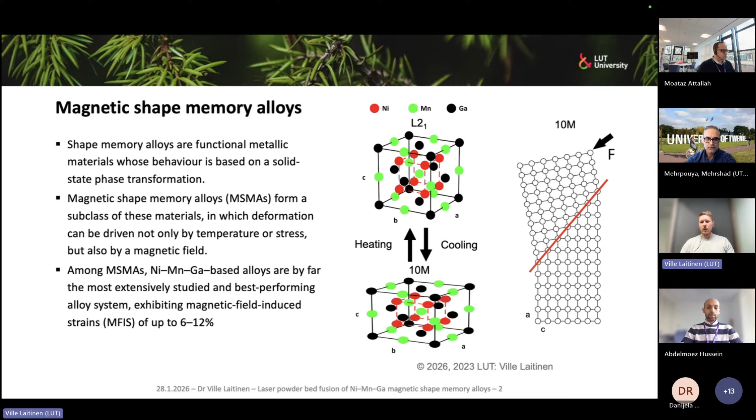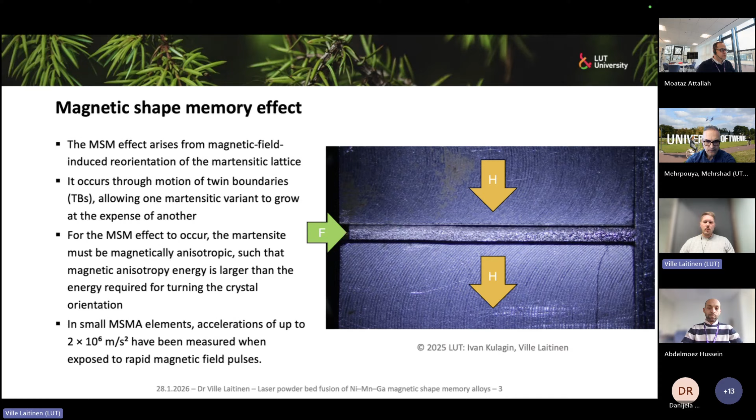Okay, here. So magnetic shape memory effect: you can see on this right side video, that's actually a nickel manganese gallium single crystal in an electromagnet. And where you have this marking F with the arrow, that's spring-loaded pressure. So by external magnetic field, we effectively elongate this element. And then once the field is removed, by the spring force we are bringing the element back to its original configuration.

And how this effect actually happens is that we have nickel manganese gallium martensite. In this figure, we have a 10-layered modulated martensite, which, if you consider the original cell of this L21 austenite, is actually a tetragonal cell. And this tetragonal cell has axes A, B, and C, where A and B are approximately equal to each other, and the C axis is shorter.

But what is nice with this material is that we have these manganese atoms placed by nickel and gallium at just the right distances from each other that we actually have a magnetic moment on those manganese atoms. And this material effectively becomes ferromagnetic, and this C-axis, the shortest crystallographic axis, is also the easy magnetization axis. And it's characteristic to this material that the magnetic anisotropy energy is significantly larger than the energy required for moving crystal boundaries, these twin boundaries between different martensite variants.

So what happens when we bring this external magnetic field is that this C-axis starts to exhibit magnetic field induced stress, which tries to pivot the C-axis direction in the direction of the external field. And this provides a pressure on these twin boundaries to be moved around. And since the variant which is in a preferred orientation grows at the cost of the variant which is not in preferred orientation, we will actually have a physical change in the material because of this flip of crystal orientation.

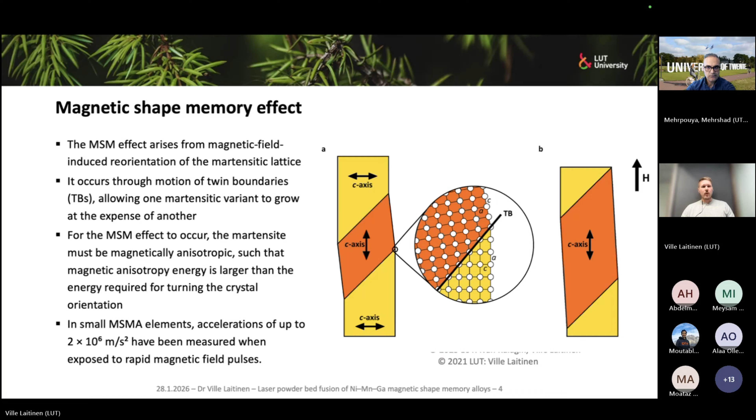I will cover a little bit of applications also. So one of the best applications we have developed so far is the magnetic shape memory micropump. How this works is that we have a nickel manganese gallium single crystal, and we bring under this crystal a diametrically magnetized cylindrical magnet. And by rotation of this magnet, we generate on this single crystal a tiny undulation. And by rotating the magnet, we can move that undulation across the single crystal surface, and in effect, we can use it to carry liquid. So it works in a very similar way as human swallowing works in a throat.

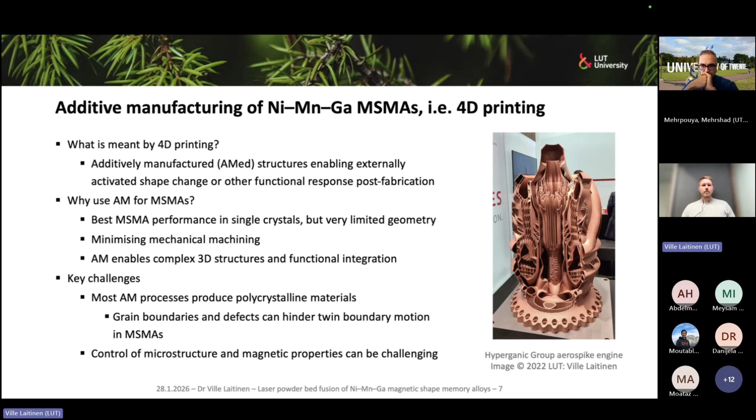So the process, laser powder bed fusion, you are probably very familiar with, so I won't go into much detail. The essence is that we have this powder bed in a sequential way. We spread powder and selectively melt it from above with the high power laser and repeat the process until we get the full 3D geometry manufactured.

Why we chose laser powder bed fusion in particular for this material is twofold. First, conventionally they have been using a lot of binder-based processes to make nickel, manganese, gallium. The problem with binders is that this binding agent, this chemical you bring into the process, is very easily transmitted into the metallic lattice of nickel, manganese, gallium during post-processing heat treatments. And if you alloy, for example, your nickel, manganese, gallium with carbon or even oxygen, you effectively ruin first the magnetic properties, and secondly, your twinning stress starts to increase so drastically that you won't be able to move those boundaries around with an external magnetic field.

And the second reason we use laser powder bed fusion is the feature resolution. With laser powder bed fusion, we can actually make very, very small actuators. And this type of metallic smart material performs exceptionally well when made into very small devices. In very small devices, conventional mechanisms like electric motors, for example, are very difficult to manufacture. So smart materials have a big competitive advantage there.

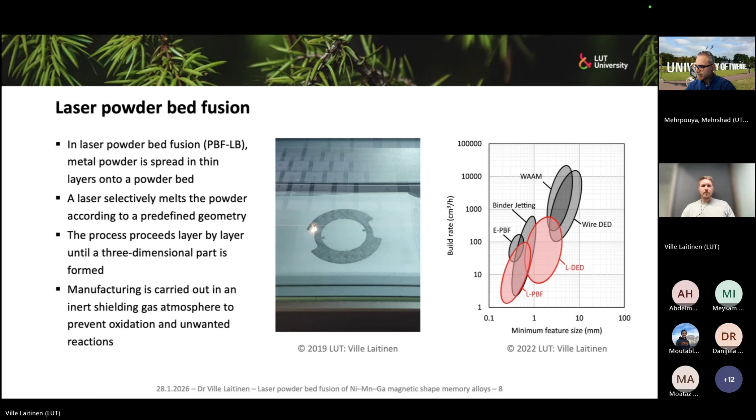The feedstock we typically use for laser powder bed fusion is argon gas atomized spherical nickel, manganese, gallium powders. The advantage of this gas atomization process is that we get very dense, spherical particles. So these are very good for the laser powder bed fusion process itself from the spreadability point of view. And also we are not bringing any inherited porosity with the particles themselves.

Then also an advantage, because it happens in an inert atmosphere, is that we have typically a very low oxygen amount in the powder itself. What we have been measuring from our powders is typically in the range of 200 ppm. Of course, this can significantly degrade if you are recycling your powder, so you can actually start accumulating quite substantial amounts of oxygen, and that's a critical point from the making of functional material, that you might need to actually keep track of how much oxygen you are putting into your powder.

But then the key result is that during this development, we have actually made quite a few batches of this, and it's clear that we need to overdose these powders with manganese because of some selective elemental losses that happen in the laser powder bed fusion. And this is something I will discuss in a couple of slides.

How the process itself, when we develop, how do we work? The basic track usually, if we start with new materials, is that we do single track, single layer kind of experiments just to see where we have a zone of weldability for the material, where we can achieve, for example, crack-free melting of the material with good wettability of our substrate material, so that we get a really good weld bead without substantial defects at that stage already. And if we manage to make a process which works in that stage, then we can move to 3D geometry.

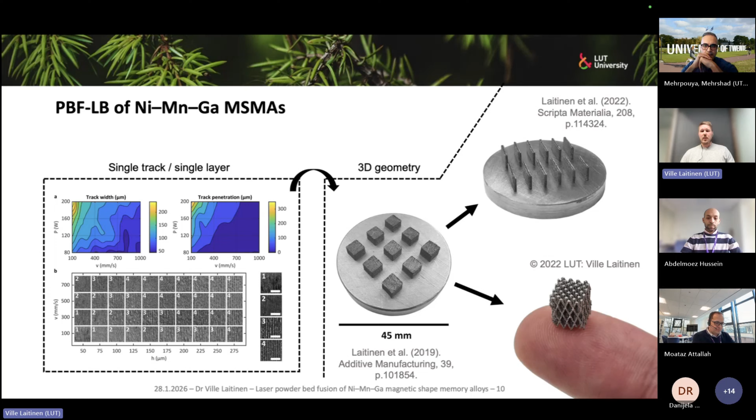Now, from a nickel-manganese-gallium material point of view, we need some necessary post-processing steps, the first being the heat treatment. After the laser powder bed fusion itself, we have a huge amount of atomic disorder inside the material, and in order to recover magnetic properties especially, we need to do a high-temperature heat treatment where we get these atoms in the right places so that we have long-range order in our atomic lattice.

We usually use a two-stage heat treatment. We have this homogenization treatment, which is quite close to the solidus temperature of the material. The point of this treatment is just to distribute those atoms equally within the geometry we have made, so basically it's just diffusion. Depending on the times, it can be something in the range of a couple of hours, or in the case of bigger parts, up to a 12 to 24-hour treatment. We can also induce quite substantial grain growth in this treatment at that temperature range.

And then we have the secondary treatment, which is the ordering temperature. This is just above the transition temperature from the B2 unordered cubic phase to the ordered L21 austenite. The point of this treatment is that we are setting our atoms in exactly the right positions just before we cool over this transition. Out of these two treatments, this is the more important one for the magnetic properties. If we go over this transition too fast, we lose some of our long-range order, and then we will have inferior magnetic performance.

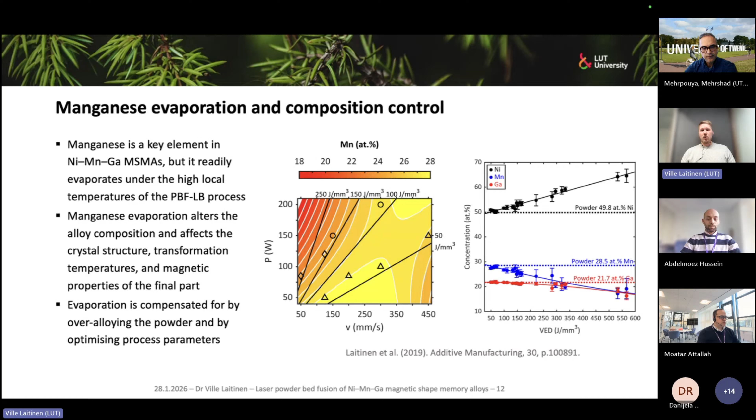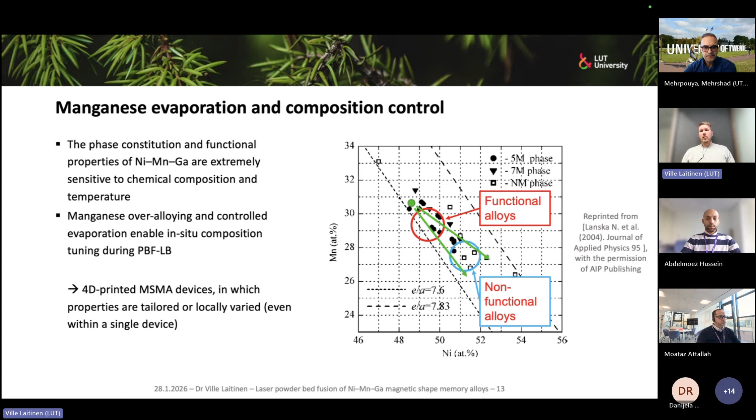And we have shown that we can actually use this for tailoring our material. We can do some fine tailoring of the martensite transformation temperature, or we can render some zones in the material or final component completely inactive. For example, in one of my studies we have this initial powder, and then this S1 sample, which is 10M martensite, the preferred martensite variant if you want a functional nickel-manganese-gallium actuator.

And then we have this S6, which is a material with non-modulated martensite. In undoped nickel-manganese-gallium non-modulated martensite, the twinning stress is way too high. You won't be able to actuate it magnetically. So it is actually a passive material, but we can still use it as magnetic shielding, for example, in a real actuator.

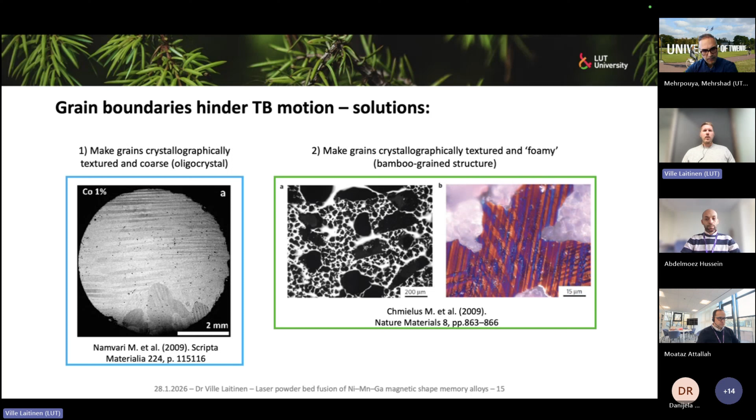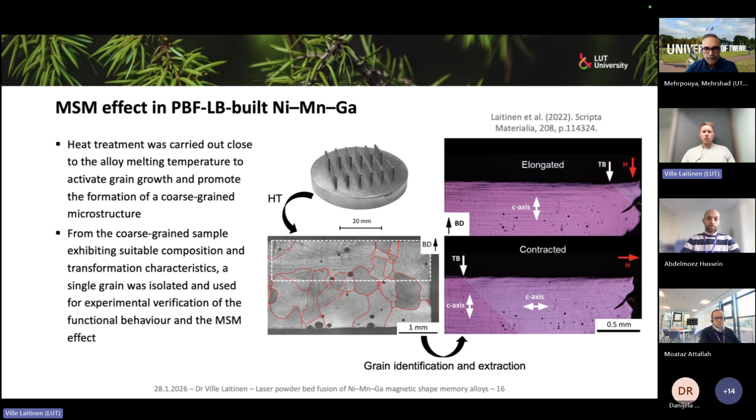And when we have this grain coarsening, then we could select an area where we could extract the grain for actual testing. So we can actually know, does this material itself have such a defect structure that it would actuate, or would it not actuate? And in this material, we could actually make almost full strain. So we can get this 5.8% magnetic field induced strain, and with this particular alloy, the theoretical maximum strain is around 6%. So it's nearly maximum theoretical strain.

And on the right side, you can see these video clips. The top clip shows different twin boundary types we could observe in this particular sample. So we have two different twin configurations. One is the normal style twin, type 1 twin, which is a very rational plane of twinning. It has a high mobility, but then we also have a type 2 twin, which is actually ultra mobile. The twinning stresses in a high quality single crystal for type 2 are in the range of 0.1 megapascal.

So the twin type 2 mobility is so high that it's almost impossible to take a good electron microscope image of it, because in the electron microscope we have an electron gun, and the electron gun generates a magnetic field. The magnetic field generated by this gun is so high that it can actually move this type 2 boundary out of the sample. So a very highly mobile boundary.

But then we also have this bottom case. This is what we would like for an actual actuator: multiple boundaries, ideally hundreds of them. So we have a finer twin structure, and this is more stable. The strain becomes very stable, and we also avoid some critical malfunctions, for example, crossing twin structure, where we have two twins that are tilted in the wrong direction, and they lock themselves into place, and it can actually shatter the sample. So that's something we might do in a post-processing step.

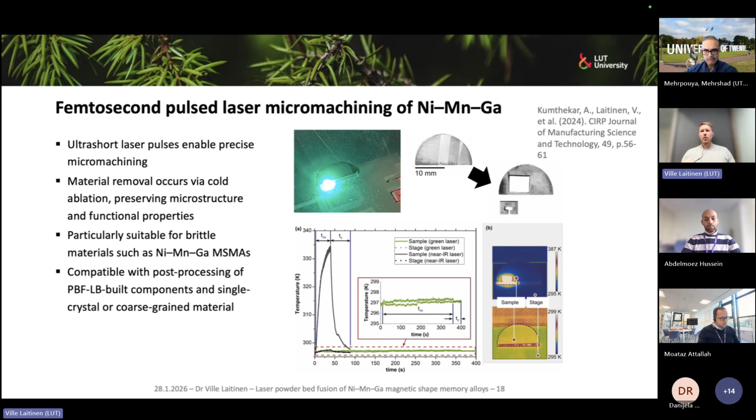So we have an example here we made from single crystal, this kind of micro gripper actuator, and it works fantastically. And we also showed that if we use green light for the machining itself, we have slightly better machining performance, and through this process we can actually machine it in martensite, so we don't need to heat it to austenite for the machining process itself.

The other approach we can take is to try to get more of this coarse grain structure. We could use epitaxial growth. This of course limits the geometry you can make, because epitaxial growth cannot be achieved in any possible geometry. We have some limitations related to it.

In this case, we made something that is more of a thin wall structure, but we tailored the processing parameters so that the single track melt pool we generate has a very shallow behavior, meaning that it's not very deep, but it's very wide. This forces the single crystal, or crystallite, to grow in a very defined direction of the thermal gradient.

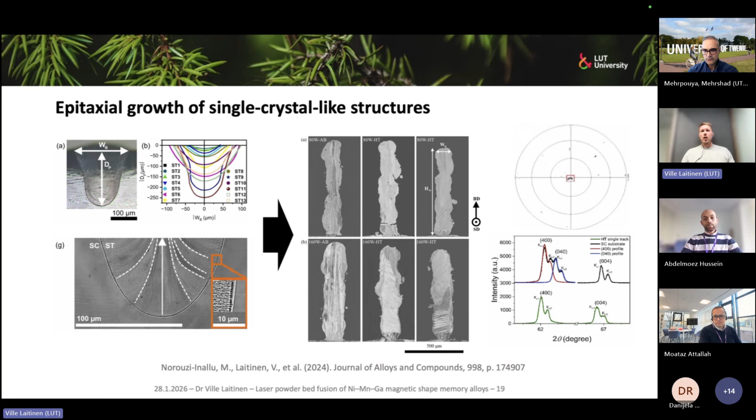This way we can make wall structures where the crystal Z-axis points up during the process. Then in a post-processing heat treatment, those very similarly oriented grains can fuse together, and we can have something very close to a single crystal. The disadvantage is that those samples tend to be very small. So we are trying to find ways to sustain similar growth behavior in a much larger sample, so we could have a larger single crystal by additive manufacturing.

Another way, which we have worked on quite extensively with Moataz's team, is what we call the bamboo grain geometry. We don't go directly into foam making, because the foam has a huge fraction of porosity inside, and the full force output of the material will significantly reduce because of this. But in additive manufacturing, we can tailor the porosity very precisely.

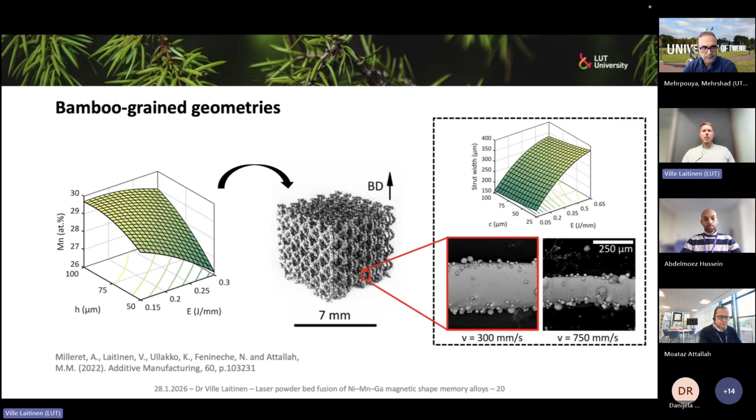In this case, we make lattice structures and tailor the parameters to achieve a very specific strut width. Then in the post-processing treatment, we can do some tricks to make this structure locally bamboo grained. We first show how we do the measurement itself.

We use high temperature EBSD, because we want to do these measurements in the austenitic phase. Martensite makes a very complex diffraction pattern, which is first very difficult to index, and second, it's very difficult to determine what is a martensite colony versus an actual grain boundary. So by heating, we can reveal the real grain structure.

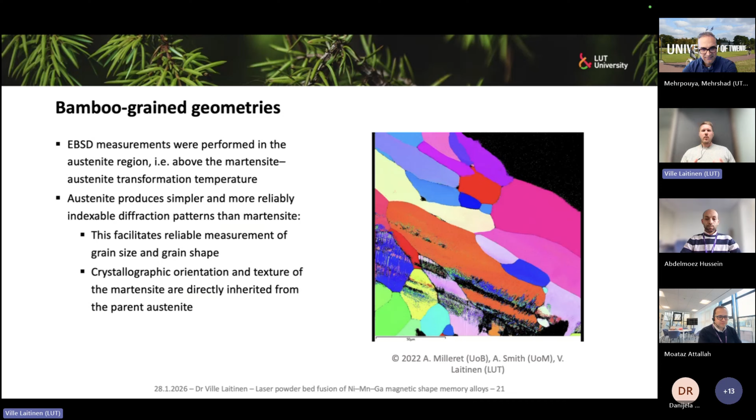The advantage is that the crystallographic orientation and texture of the austenite are perfectly correlated to the martensite. There's only a 0.3 degree deviation in the axis direction, so it's nearly the same from the actuator point of view.

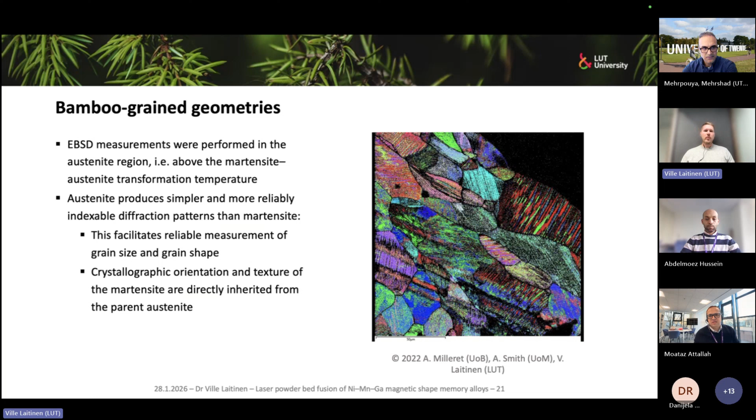Ville, try to wrap up if you can, okay? Yeah, I have two slides.

It's okay. As built, we can see very tiny grains, but in the post-processing heat treatment we expand those grains and they fill these narrow struts, so we get a structure of interconnected single crystal struts, and node areas with several grains. In an external magnetic field, this type of structure can strain 6%.

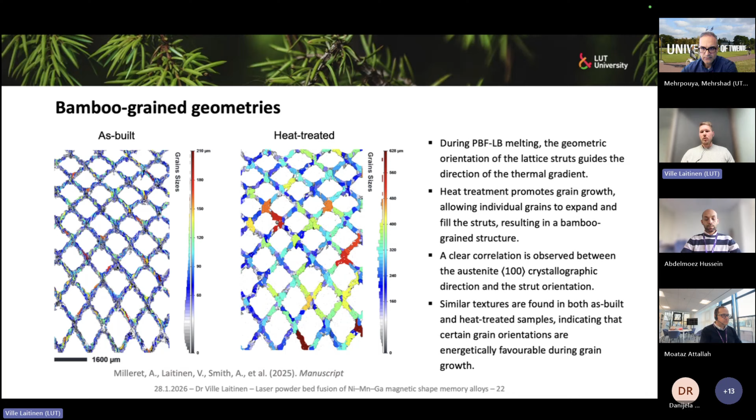In the martensite. So it is effectively a good actuator approach, but it takes a lot of tailoring of the ideal strut angle and the ideal way to implement the actuator based on this structure. The nice part is that the crystal orientation tends to follow the strut direction because of the thermal gradient, so we have crystallographic texture of austenite, translated to martensite, and after heat treatment we don't lose this texture significantly, so we maintain some primary directions, which still should be modeled a little better.

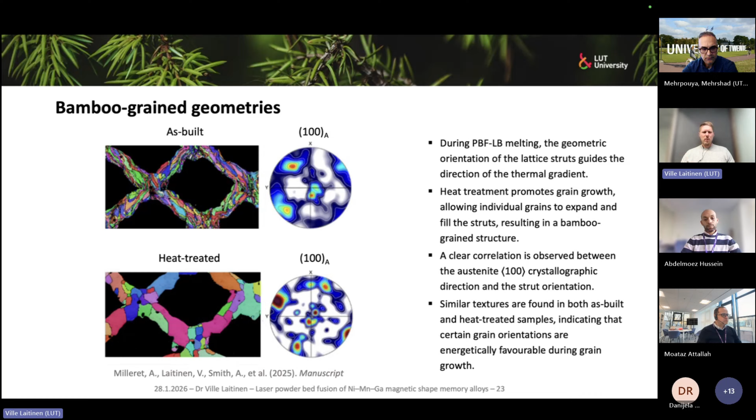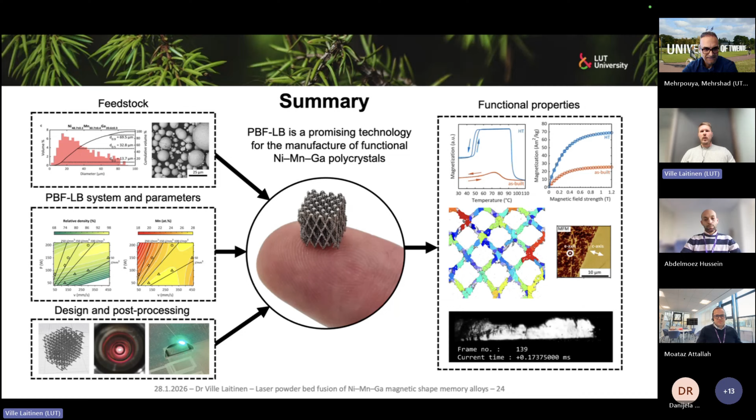So can we manipulate this behavior a little bit more? And this is a short summary. We have lots of different considerations from the feedstock and processing point of view, and then what we can actually do with the functional material.

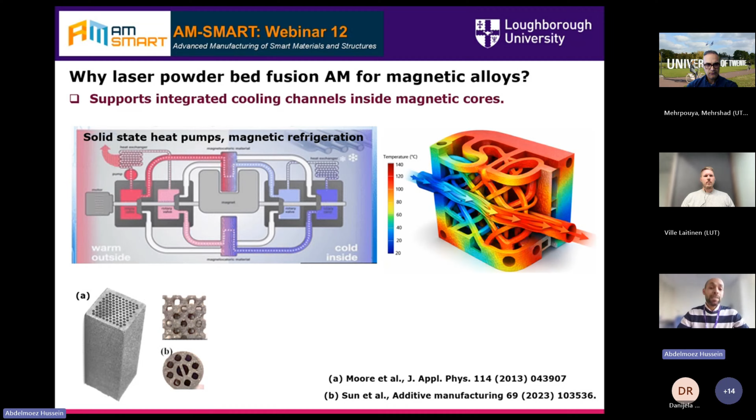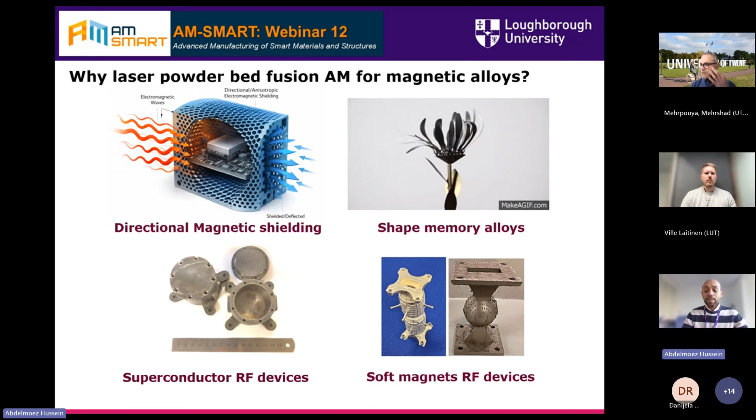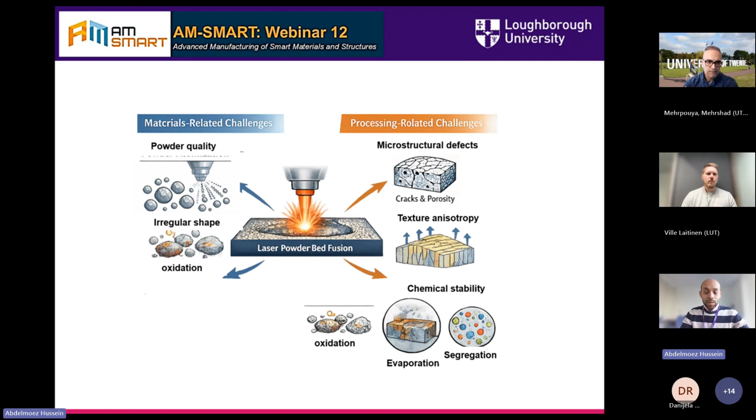So now we know why we can use laser powder bed fusion in some magnetic applications and why they need it. Now I'll go directly to the challenges that we may have when we process a magnetic material in general. There are two kinds of challenges. The first one is related to the powder itself once we start to produce the material, and the other challenges come when we start to process the material. I'll talk about every item specifically. Let's start with the material-related one.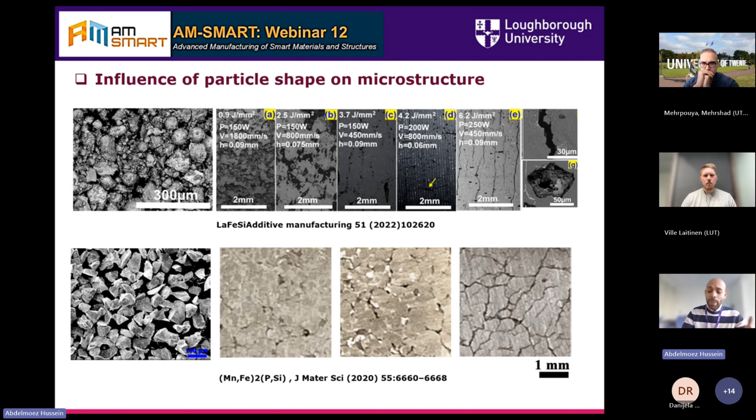Probably the crack width is almost 10 microns, or probably 15. The lower one as well, there are a lot of cracks. And unfortunately here, these microstructural defects are not related to the laser processing parameters. Of course they are related to the processing parameters, but more likely to the flowability of the powder. They don't flow nicely due to the rocky shape, or the many satellites they have. So they have another defect added to the process, and you can't get rid of it, even by changing processing parameters.

The second one is oxidation. For this powder, what's the amount of oxides in the material? This can be determined during the atomization process. A lot of powders you can just start atomizing without gas to protect from oxygen. However, magnetic materials are very, very sensitive to oxidation. Even a very small amount can change the material properties.

The second thing that I have found is how many times you are going to use your material. If you use your material for the first time, you can probably get good magnetic properties from the resulting additive manufactured part. However, I was very keen on every build to keep the material isolated from the atmosphere in powder storage, and to keep it away from oxides.

However, what I found is that every time I start the second build, third build, fourth build, the material properties start to be different, even slightly, which results in poor magnetic properties with recycling. So powder recyclability is another issue.

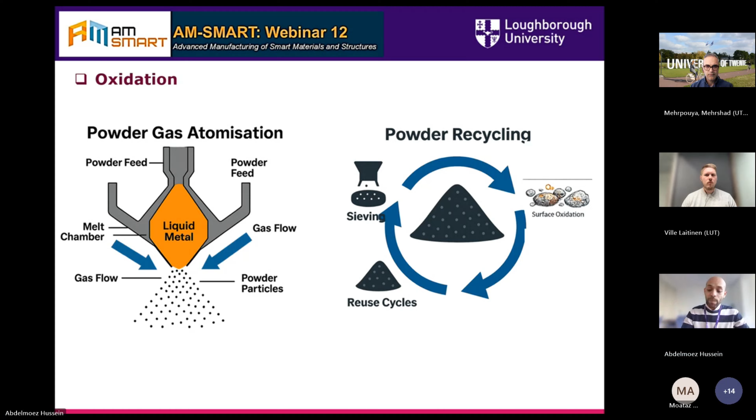So now we will move to the process-related challenges, and the first one is magnetic anisotropy. To understand how laser powder bed fusion affects magnetic anisotropy, let's first know what magnetic anisotropy is. If we have a magnetic material and you apply a magnetic field in one direction or another, the material responds in a different way. So let's summarize it as a different response of the internal magnetic properties of the material according to the applied magnetic field direction. And this is a hysteresis loop.

This is what we need from soft magnets, for example. And this is a good example of magnetic anisotropy. For the black one, the material starts to saturate when I apply a small magnetic field, probably at this point, 100, and the coercivity is low. So this is good for a soft magnet. However, for the same material, when we change the direction of the applied magnetic field, it's almost not saturated, and the coercivity is a little bit high.

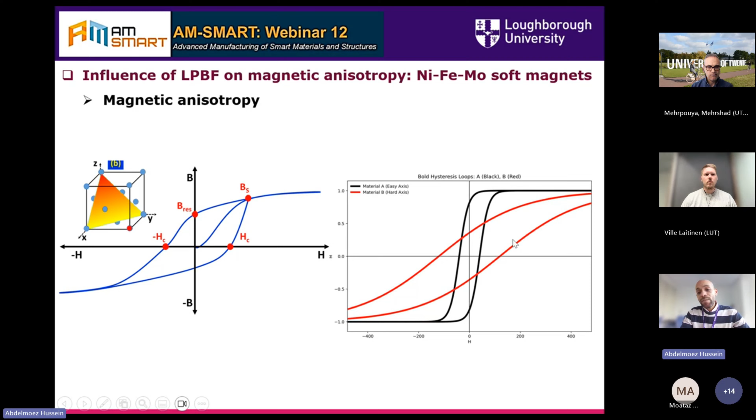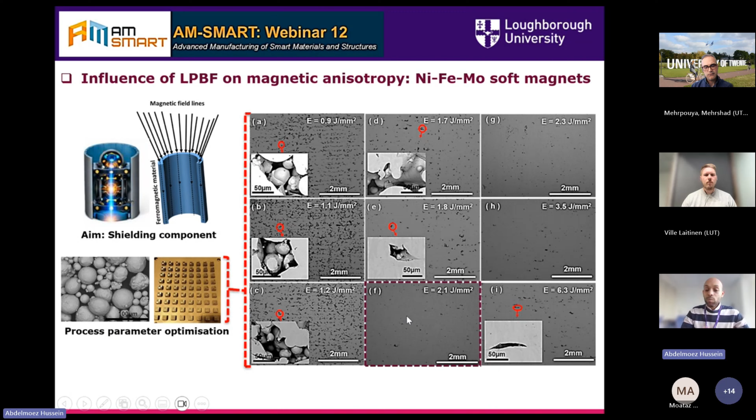So how can laser powder bed fusion affect magnetic anisotropy? One of the examples we faced for magnetic shielding was permalloy, nickel-iron-molybdenum, to make a component for magnetic shielding. So we normally start from powder, go through the design of experiments to optimize the laser parameters, and we found a good condition, which is letter F. Now we achieved minimum porosity. So let's discover the magnetic properties, which is the logical step.

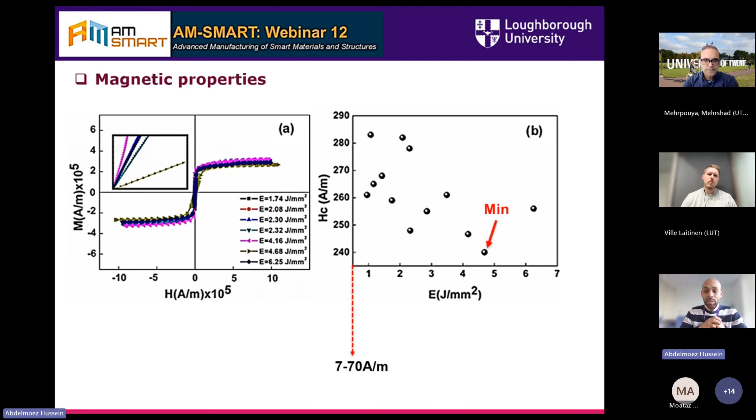We found that even this condition with the lowest porosity has a coercivity of almost 240 ampere per meter, which is way higher than the commercial one, which should be between 7 and 70 ampere per meter. This big difference between the commercial one and the additive manufactured one must have a reason. To know what we have, we went for the internal investigation, and we got something interesting from the XRD.

From the XRD, we found that all samples with all the different laser powder bed fusion parameters have a rich texture in the 100, and the 111 is weak or a little bit low, and this has also been confirmed by EBSD. This is important information because, from the magnetic properties of this alloy, the high 100 texture corresponds to the hard axis of magnetization.

So this is a magnetic anisotropy that we have. So that's why the material gives us a very high coercivity and the poor magnetic properties, because in all our samples the texture has been arranged on, let's say, the bad axis. So that's why it resulted in the poor magnetic properties.

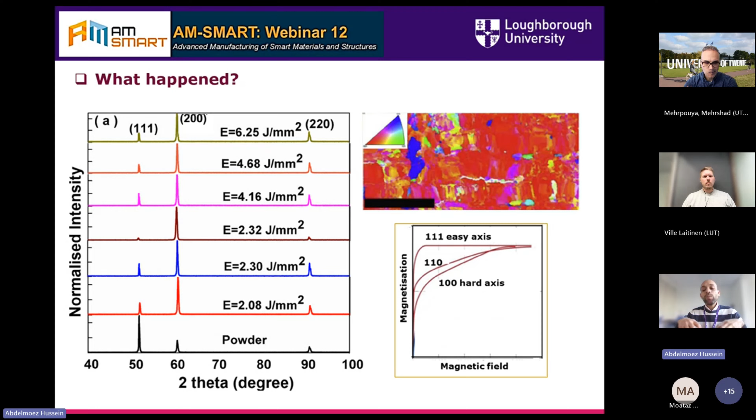So the solution for this one, we try to control the texture. We try to get the texture back to the easy axis of magnetization, and to see, can we manage to do this? So we try to tilt the texture by tilting the cube by 35 and 45 degrees, as we can see here, with respect to the build direction. And when we have done XRD, we find that the 111 direction starts to grow again, and that has also been confirmed by the EBSD.

And when we measure the magnetic properties again, we find that there is an improvement on the coercivity from 244, it even decreases to 76, which is very close to the commercial one. So at least we managed, by controlling the microstructure, to get very close to the commercial ones. And that was one challenge.

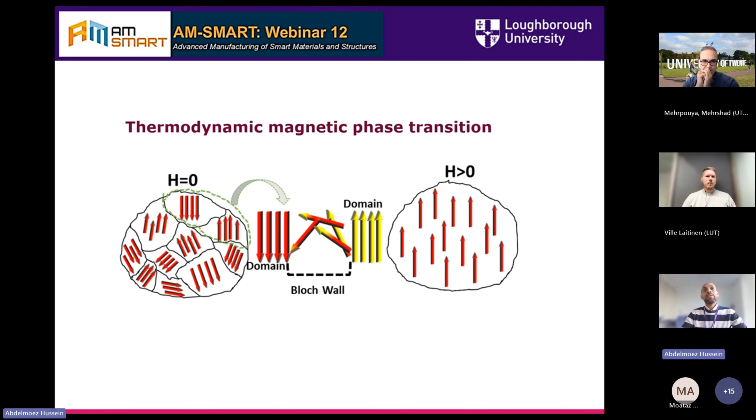The second challenge from the processing viewpoint is the thermodynamic magnetic phase transition. To understand what this is, we will have a look at a case study, which is magnetocalorics. Magnetocalorics are materials that can heat up or cool down once we apply a magnetic field, which is used in the solid state heat pump example that we have seen on the first slide.

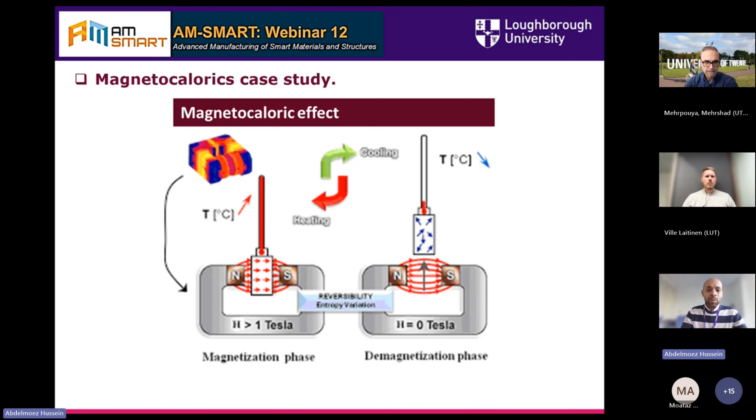So we were doing some work on these magnetocalorics, and there is a ferromagnetic-paramagnetic thermodynamic phase transition. There are a lot of phase transitions, but we will take the ferromagnetic-paramagnetic as an example, and I think it's going to be almost applicable to other thermodynamic transitions. Here we can see the spins of the magnetic domains are at low temperature in the ferromagnetic state, and with increasing temperature they start to get randomized to the paramagnetic state.

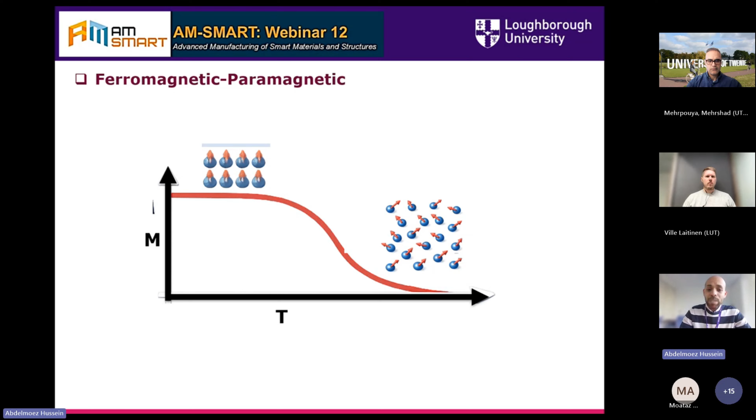How can this process be affected? This transition is a very critical transition for the applications that we are looking for. So there are two kinds associated with this transition. It could be a first order or second order transition. In the first order transition, this drop in the magnetization should be sharp and discontinuous, and it's associated with a heat exposure, which gives us the applications that we need.

However, in contrast, the second order has a very gradual transition and no hysteresis, which is associated with probably very low temperature change, which is not required for our application. We need a material that, when we apply a magnetic field, has a first order transition, so we can have a high temperature response. So we start as normal from powder.

The powder was good. It shows almost a first order, as we can see, like a sharp drop. This is the magnetization at room temperature, of course. However, when we process using some parameters, we can find there is a gradual transition, which is an indication of a change in the transition. Some of them give a sudden one, but we will see why they give this one later.

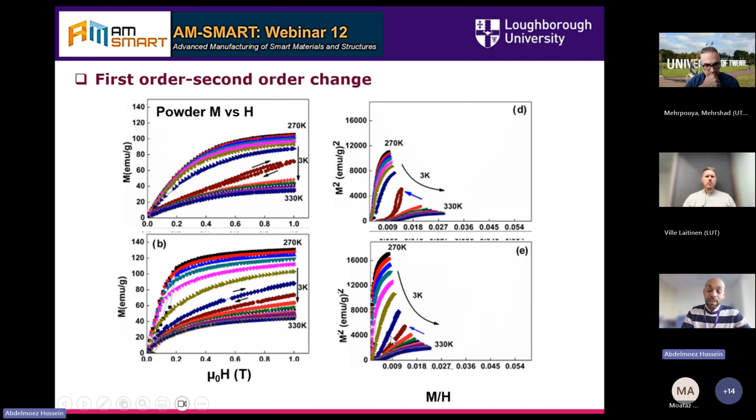So the reasons why we lost the first order, sorry. This is because there is a segregation happening in the material. This segregation affects the chemical composition of the material. So the starting nominal compositions that we started with have been lost in segregation to secondary phases, probably oxides, probably iron, probably lanthanum. So secondary phases are affecting the phase transition itself.

The second one is the evaporation. As my colleague Ville has just said, it's very sensitive, specifically for manganese. And for manganese here we have it. We find that the manganese starts to decrease a little bit, and even silicon and even lanthanum. So this is affecting as well the first order transition to the second order.

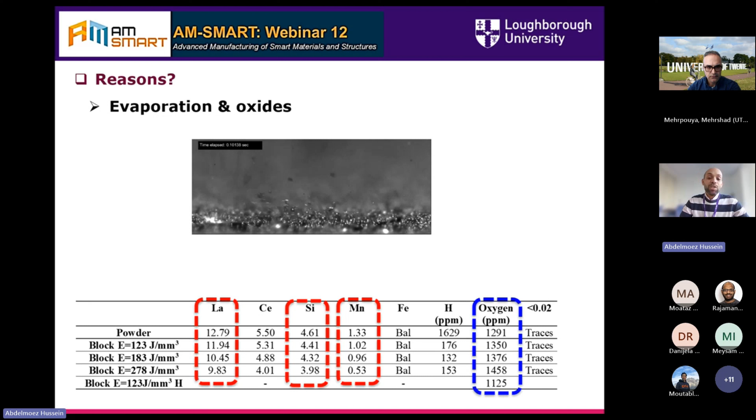And of course, we cannot deny the oxides formation. And oxide formation normally has an antiferromagnetic nature, which is opposite to the nature of the ferromagnetism that we are looking for.

The suggested solution for these things, in general, we will need to compensate the evaporated elements. This is the first one. The second one, to do post-processing. Post-processing is very critical for some materials. For example, the lanthanum iron silicon one, we have to do almost 7 days of heat treatment to get rid of the secondary phases that we have, the iron-based and even the lanthanum-based one. So that was a very long process, but it's essential to get to the nominal compositions that you started with.

The hydrogenation, which is heat treatment in hydrogen atmosphere, is also important for some of the materials because it can break down or decompose the oxides that have been formed during the process itself. So this is very critical. Both alloys and both examples that I have used today have been hydrogenated, heat treated in hydrogen atmosphere with a specific pressure as well.

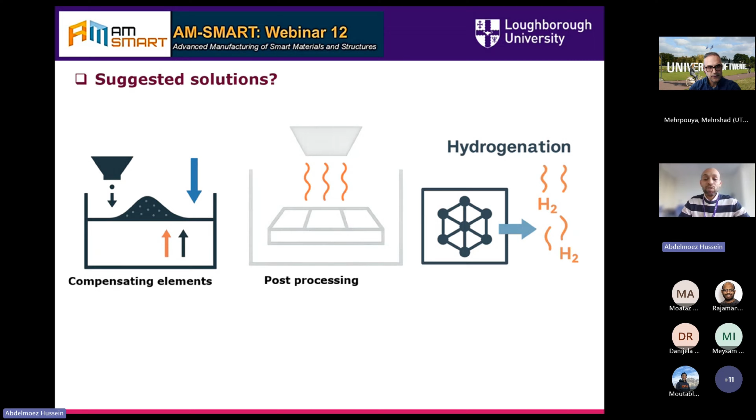In conclusion, there are two kinds of challenges. Probably we cannot get rid of all of them or even beat all of them. It's the powder quality, which is something that we cannot control because it depends on the nature of the material. And oxidation, how many times you are planning to use your powder. I believe this will be an important factor that you need to consider.

From the processing, the microstructure defects, the cracking and porosity affect the magnetic properties in general, doesn't matter what it is. The texture anisotropy or the magnetic anisotropy, you can control it and sometimes you cannot. And evaporation, some of the elements are evaporated because they have a low melting point or low evaporation point, and the oxidation during the process itself, and segregation. All of these can affect the resultant magnetic properties.

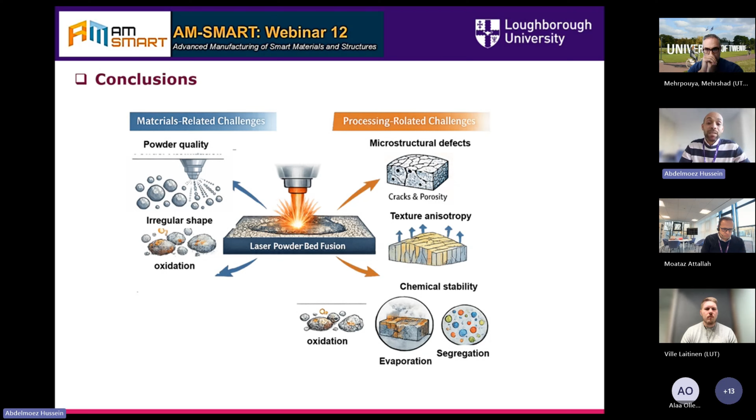And now for the question, are these solutions that I have just suggested global? Can we use them for several materials or all of the materials? My answer is no, because every material has its own specific conditions. For some of the materials, like the nickel iron where I have done texture control and magnetic anisotropy, that was not that hard. However, if we try to apply it for the magnetocaloric, it's different. If we try to do it for the neodymium iron boron permanent magnet, it will be way more difficult, because the phase is different, and neodymium volatilizes easily and gets segregated, or even melted within the grains.

So the short answer would be no. We need to investigate each material to find its own conditions and challenges. However, this is the last statement, and I'm going to end. Some of the challenges should be common. So hopefully in this presentation, I covered as much as I can from the challenges and from my experience.

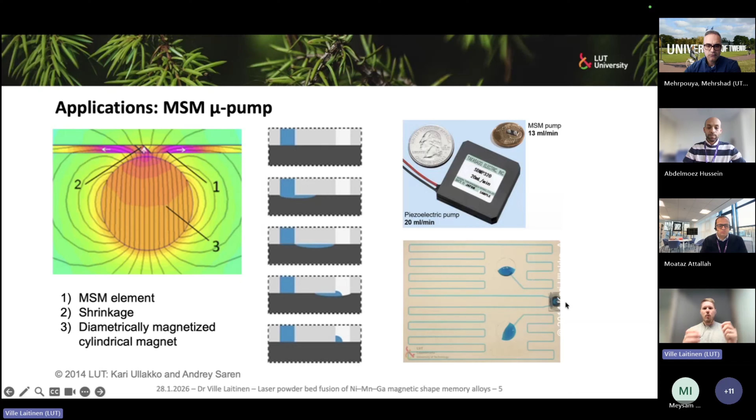or you could have, for example, two pumps with different sources. You could have one pump that is pumping, for example, water, and one that is pumping oil, and you can make individual droplets which you can then sequence as you wish with those pumps.

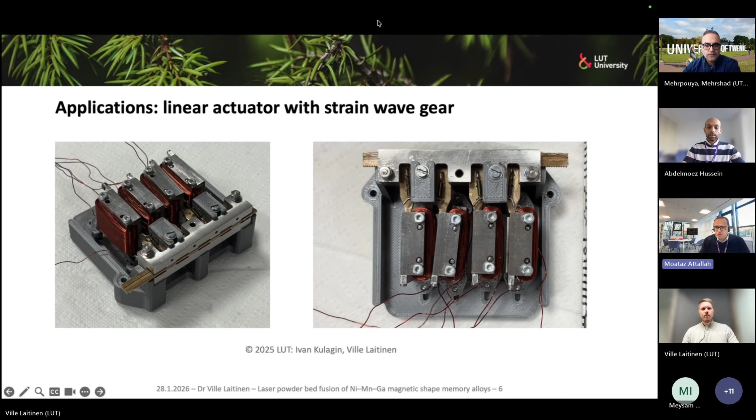Thank you, Ville. I have a question now for Moaz. Did you evaluate the relative cooling power values compared with the gadolinium-based compounds? Can you repeat the question, please? That's for Moaz. Sorry. Yeah. Okay. Yes, let me share.

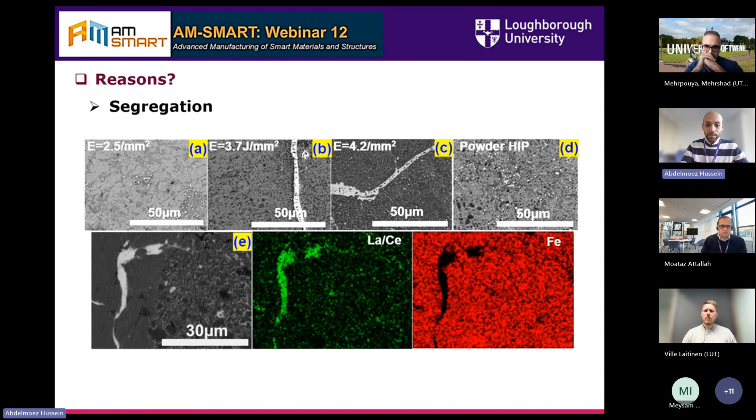Yes. The relative cooling power, just to define it for the others, is a multiplication between the maximum magnetic entropy change and the full width at half maximum. There are two things about the relative cooling power. The first one: in spite of being used a lot in publications, it has also received a lot of criticism for using it to compare or express the quality of a material in terms of magnetocaloric.

This is because a material, for example, can show a delta S of 2, but have a very wide full width at half maximum. So it receives a lot of criticism. This is the first one. The second one, gadolinium is the ultimate; of course, it should be the benchmark for magnetocaloric.

I agree with this one. So I think to compare it with this one, we need to measure the delta T, adiabatic temperature change. And we already have done this one. And for our material, we find it gives 1.4 Kelvin at 1 Tesla applied magnetic field. This is still below the gadolinium, of course, because gadolinium, as I mentioned, is considered the benchmark.

However, we are trying to replace the gadolinium with other materials. Like 1 kilo of gadolinium, I think probably it's $4,000. So we are trying to replace it with another cheaper material. So the short answer should be, we compare the adiabatic temperature change, which is 1.4. It's almost around 45% of the gadolinium. Hopefully we can make some changes to get this number high.

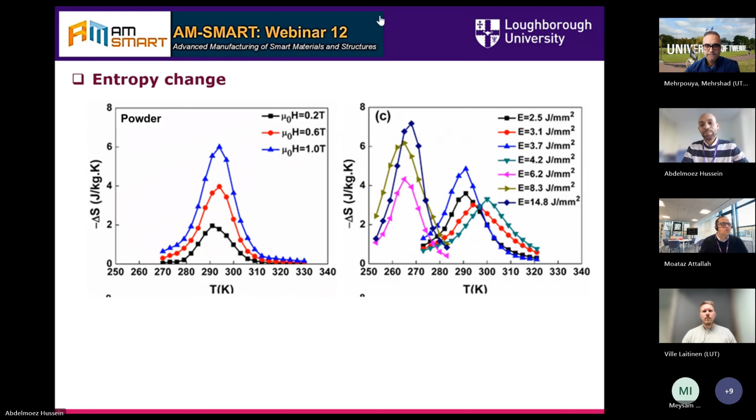Thank you, Moaz. There's another question about cycling. Yes. About the cyclic response of magnetocaloric materials. For magnetocaloric, what is the minimum printing size realistically possible? It depends. No, there's a question before as well. Did you also measure the cyclic response? No. We didn't. We hope to measure this one, but I think it takes a lot of time and a lot of the material itself.

I mean, according to the shape of the material, the internal shape of the microstructure, I wouldn't say it will survive for a lot due to the powder shape, the rocky things and the satellites. So if you try to magnetize and demagnetize, it will go to a point where the material starts probably cracking or damaging, because there are a lot of stresses as well coming from the applied magnetic field. So the short answer would be we didn't try it. However, we believe it wouldn't survive for at least 4,000 cycles, which is also the benchmark for gadolinium as well.

Okay. The second one. One last question today. For magnetocaloric materials, the minimum printing size possible. So it depends on probably the machine and the process. I think a lot of factors can answer this question. The machine tolerance, probably the powder size, probably the scan strategies, probably a lot of things.